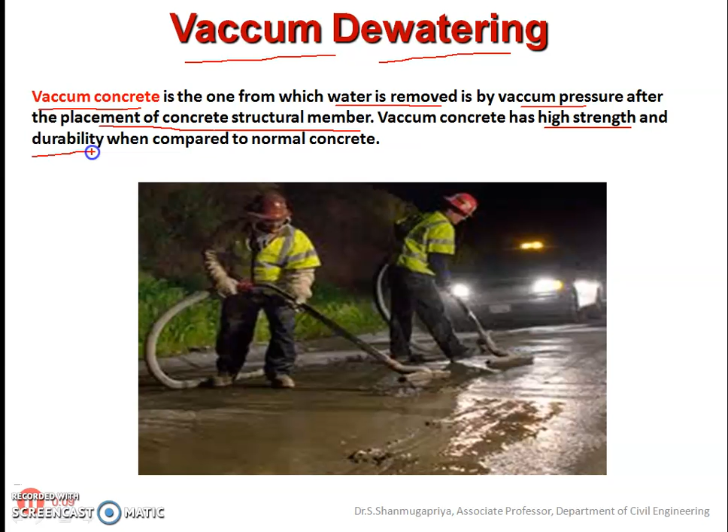So let us understand first what is a vacuum concrete. See, vacuum concrete means it is a kind of concrete where the water is removed by the vacuum pressure after the placement of the concrete structural member. And this vacuum concrete has got high strength and high durability when you compare to the normal concrete.

So we'll understand what are the aspects that govern the strength and durability of the concrete. We all know very well that what is very important for the concrete is water cement ratio, right? So water cement ratio is very important for the concrete. What we do, we go for restricting this water cement ratio in order to get the highest strength.

So if you want the chemical reaction of the cement to happen with water, then the water cement ratio should be less than 0.38. But in practicality, the adopted water cement ratio is more than 0.38 because we have to satisfy the requirements of workability. Apart from the strength, workability is also very important, because only when the workability is there can you place the concrete in the formwork easily without any honeycombing.

So in order to satisfy the requirements of workability, you are adding more water. This excess water eventually gets evaporated, leaving capillary pores in the concrete. Because of those capillary pores, it results in high permeability and less strength in the concrete. So the two requirements, workability and high strength, don't always go together, as their requirements are contradictory to each other.

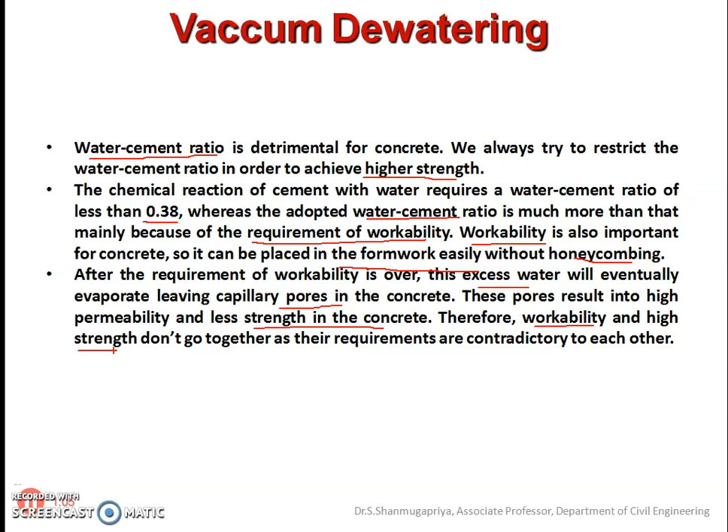So that is where this vacuum concrete plays the role. Vacuum concrete is nothing but an effective technique used to overcome the contradiction of the opposite requirements of workability and high strength. With this technique, both are possible at the same time; workability as well as high strength can be achieved in vacuum concrete.

So in this technique, the excess water after the placement and compaction of the concrete is sucked out with the help of vacuum pumps. This technique is effectively used in industrial floors, parking lots and the deck slabs of bridges. The magnitude of the applied vacuum is about 0.08 MPa, and the water content gets reduced by up to 20 to 25%. The reduction is effective only up to a depth of 100 to 150 mm.

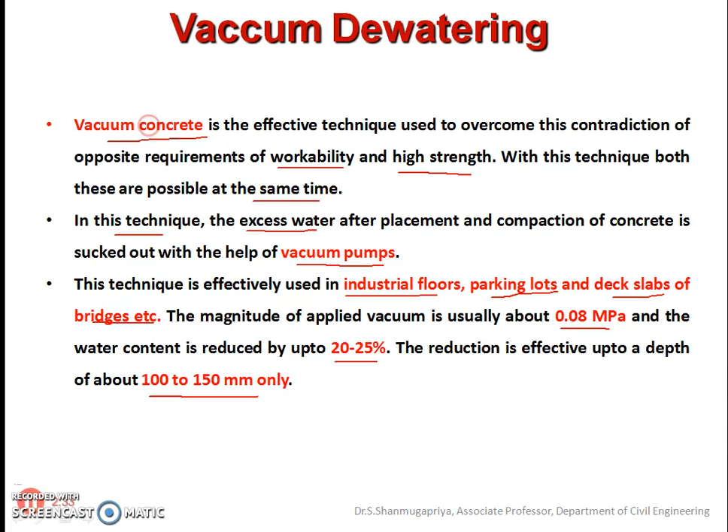So we'll see what is this technique and what are the equipments required for vacuum concreting. The main aim of this technique is to extract the extra water from the concrete surface by using vacuum dewatering. As a result of dewatering, there is an effective reduction in the water cement ratio, and the performance of the concrete improves drastically. This improvement is more on the surface, where it is required the most.

So basically there are four components involved in the vacuum dewatering of concrete. The first one is the vacuum pump, the second one is the water separator, the third one is the filtering pad, and the fourth one is the screed board vibrators. We'll see the arrangement of this vacuum dewatering process in the next slide.

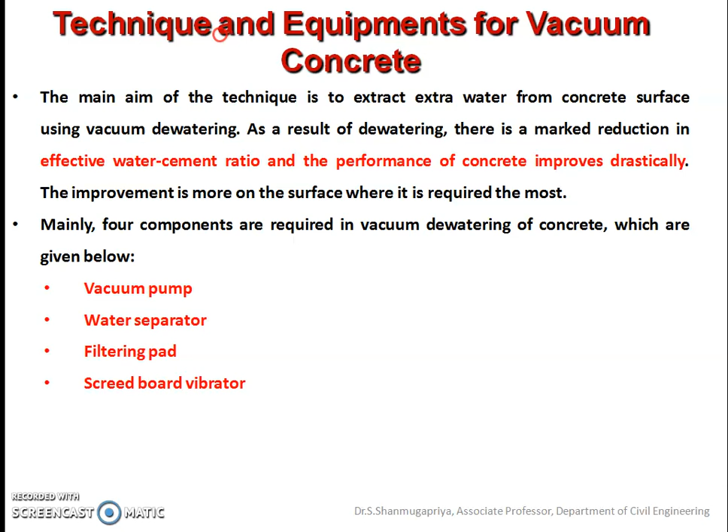So here you can see the clear picture of this vacuum dewatering process. It has got a vacuum pump here, and this is the water separator, and here you can see this is the concrete surface, and on the top of the concrete surface you have these filtering pads, and on the top of this filtering pad you have this watertight backing sheet, and at the end of the filtering pad you can see it is sealed with the rubber.

So the rubber seal is there at the end of the filtering pad, and this filtering pad will have these wire gauges or the muslin cloth. We'll get into the details of this arrangement in the next slide.

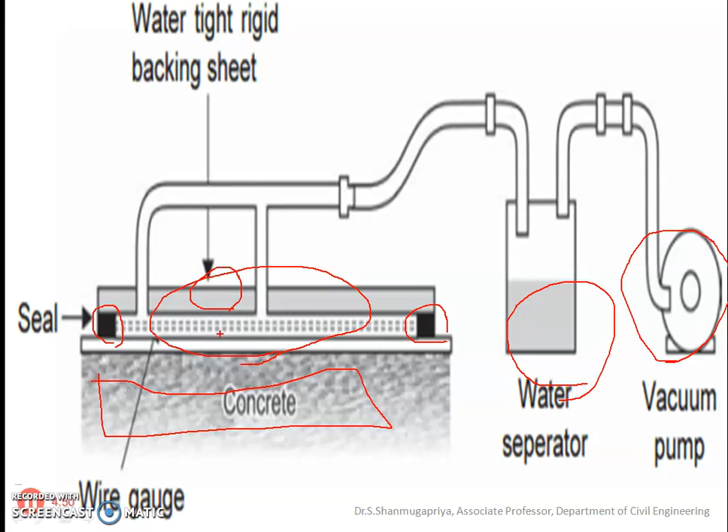So this vacuum pump, as you have seen in the previous slide, is a small but strong pump having a capacity of around 5 to 10 HP, that is 5 to 10 horsepower. The water is extracted by the vacuum and then it is stored in the water separator. The mats are generally placed over the fine filter pads, which prevents the removal of the cement with the water.

So in the previous figure you can see this is the vacuum pump, which is of 5 to 10 horsepower, and here you can see the water separator for collecting the water, and this is the filtering pad which is placed over the concrete, where on the top you have this watertight backing sheet, which prevents the removal of the cement with the water.

So here there is a proper control on the magnitude of the water that is removed, so that whatever water is removed is equal to the contraction in the total volume of the concrete. About 3% reduction in the concrete layer depth takes place.

As I told, the filtering pad consists of the top rigid backing sheet. It will have some expanded metal, or it could be a wire gauge or muslin cloth sheet. A rubber seal is also fitted around this filtering pad, and this filtering pad should have a minimum dimension of around 90 centimeters by 60 centimeters. And we'll see what are the advantages of the vacuum dewatering.

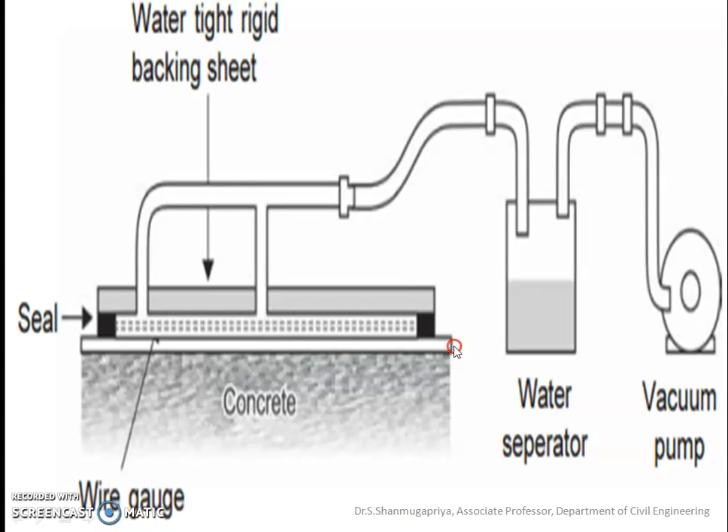So you can see the vacuum pump, and here the water extracted by the vacuum pump is stored in the water separator, and this is the filtering pad where at the end you can see the rubber seals, and the minimum dimension of this filtering pad should be 90 by 60 centimeters. Now we'll see the advantages of vacuum dewatering.

Due to the dewatering through the vacuum, we can satisfy both requirements, that is workability as well as high strength. Number two, there is a reduction in the water cement ratio, which increases the compressive strength by around 10 to 50%, and also lowers the permeability.

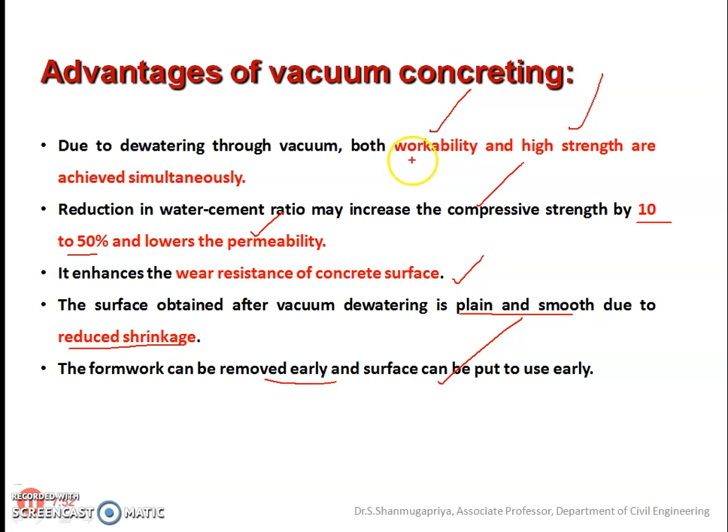Number three, it enhances the wear resistance of the concrete surface, and the surface obtained after vacuum dewatering is plain and smooth because of the reduced shrinkage. Also the formwork can be removed early and the surface can be put to early use. So this clearly explains the advantages of the vacuum dewatering process.

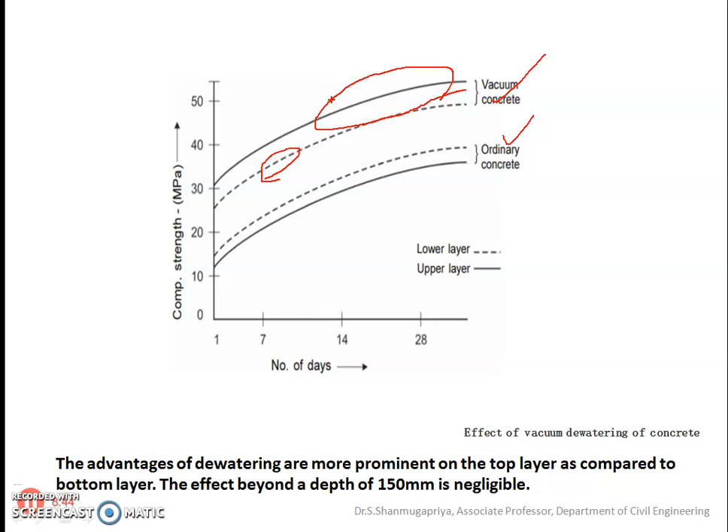So in today's lecture I've explained what vacuum concreting is, what the vacuum dewatering method is, the arrangement of vacuum dewatering, the components in it, and we have also discussed the advantages of the vacuum dewatering process.